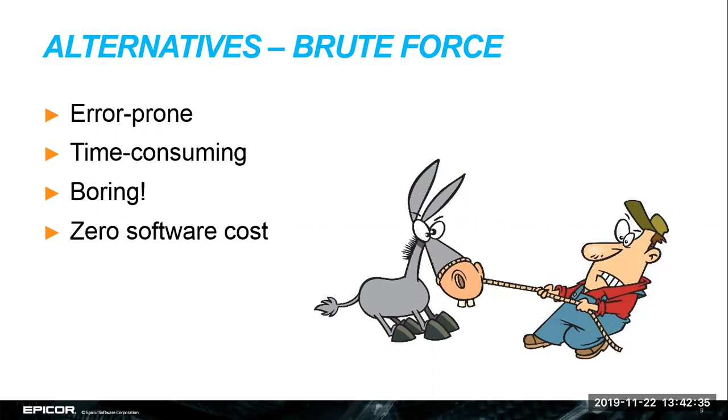The other alternative is the two-step approach. So the two-step is where you would export that information into, let's say, an Excel or a CSV format, and then import that into EPICOR. So it's slightly faster than brute force. I'd say it is faster if you have thousands of parts.

It is faster, but most of the time it requires setting up that data, massaging that data in both CAD and in EPICOR, so that as you import it, it's in the correct format, and so that there's no errors when you're importing that. Same thing when you export it. We have to make sure that the data that we're getting from CAD is in the correct format. So there's some time required to do that. There is no bi-directional connection.

So with CADLink, one of the benefits is not only the automatic part and bill of material creation from that CAD integration, but also the synchronization of data between your engineering and EPICOR teams. So with CADLink, we have a bidirectional connection, so we can synchronize descriptions, we can synchronize part information so that your engineers are working with the same information that people in EPICOR are working with.

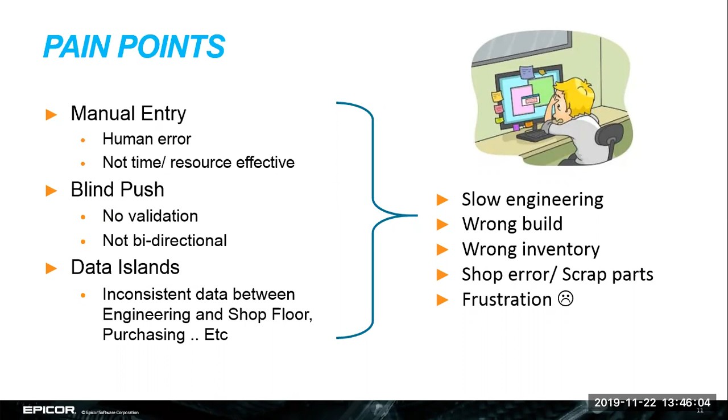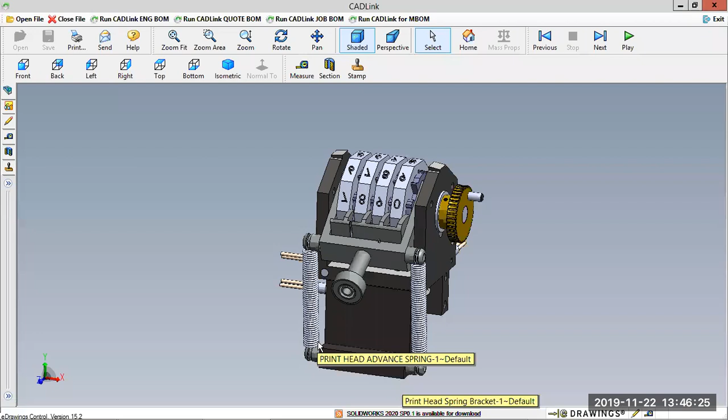So what's our solution? Well, our solution is CADLink. That live bidirectional integration between your engineering software, CAD, PDM, and PLM, and EPICOR. So what does that look like? Well, let's take a look right now. I'm going to jump into a demo. To do that, I'm going to use this model here. So I am using an eDrawings version.

But like I said before, we have integrations to over 40 different CAD, PDM, PLM systems. If you are interested in seeing a demo with your engineering files, we do offer custom demos, so send us your files and we can show CADLink working with your files. For the purpose of this webinar today, I'm just going to be showing our eDrawings integration here on the EPICOR sales image.

And CADLink is a direct integration to those CAD systems. So in here, we can see that at the top, I've got my CADLink options. So run CADLink engineering BOM here at the top. In your CAD system, it would work exactly the same way. In SolidWorks, we're built into the tools option menu. In Inventor, we have another ribbon at the top. In PDM, we're built as an add-in to your PDM system.

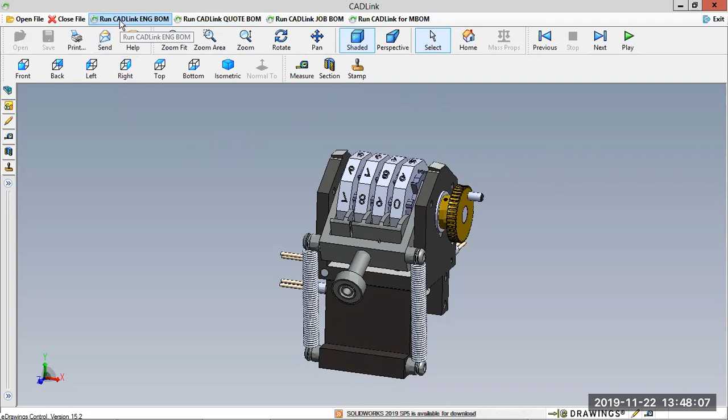So we're integrated directly into the CAD software. So your engineers don't have to leave the application that they know to be able to grab bill of material and part information and push that into EPICOR. So I've got my assembly here. I'm an engineer, I've finished my design, and I want to push this bill of material into EPICOR. So I would just launch CADLink engineering BOM.

And what CADLink is doing now is it's going to grab that bill of material from your CAD system, and it's going to grab that part information, and it's going to compare with what currently exists in both the EPICOR part master and what currently exists in my EPICOR bill of material for this part.

So CADLink can be extremely useful if you're going from Rev A to Rev B, and you're updating that bill of material in EPICOR. You can see exactly the changes that you've made from Rev A to Rev B that you're about to make in EPICOR. Because we compare the bill of material that you have in CAD, which is now your Rev B, with your Rev A in EPICOR. So we can see parts that are being removed, quantities that are changing, parts that are being added, etc.

And the result of that comparison and how we view those details in the CADLink interface, which is what we're looking at here, is through our color coding system.

So we can see, or I'll show you that on the left-hand side, we see an indented bill of material structure. So we do maintain that indented bill of material structure coming from your CAD assembly. There's no limit on the number of sub-assemblies that you can have here, but we do maintain an indented bill of material structure in EPICOR. And we've got all of these different colors that are showing me the results of that comparison between my CAD assembly and what currently exists in EPICOR.

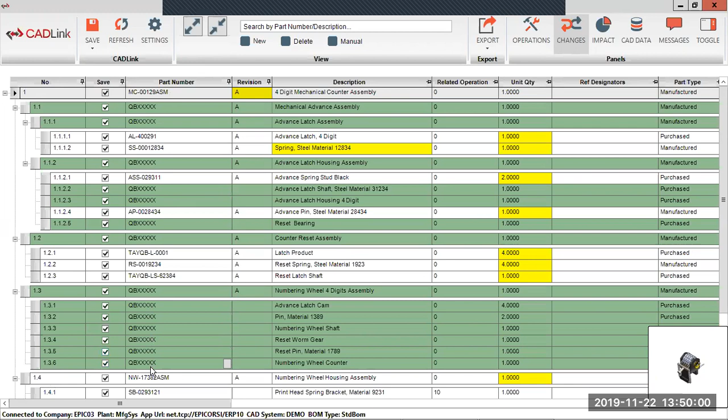So going through each of these colors, the green line items that we're seeing here, these are parts that do not yet exist in my EPICOR part master. So CADLink uses the part number as the key to look into the EPICOR part master to try and find that part. If we do not find it, we will highlight those in green to indicate to the engineer that this part number does not yet exist in my EPICOR part master. CADLink will then create that part for you and insert it into this bill of material in EPICOR for you.

So again, really going back to reducing the double data entry, our engineers are entering this information already in our PDM, PLM, or directly into our CAD system. We don't want to re-enter that information. We want to let CADLink create those parts and insert that into the bill of materials for you.

We can see that for these green line items, we've got a QB and 5 X's at the end for all of them. You may be wondering what that is, and that's the CADLink auto part numbering. So if you're not using a PDM or PLM, but you want to take advantage of EPICOR auto part numbering, we can set up CADLink to work with that. So grab the next available part number, and automatically assign that to your parts that you're creating in EPICOR. And because of that bidirectionality, we'll write that part number back into your CAD properties. So we'll see what the generation of these part numbers will look like when I do a save into EPICOR.

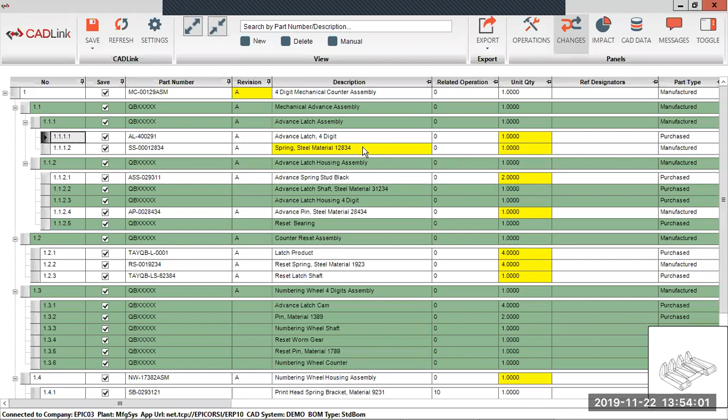Going back to that bidirectionality, seeing that there's a discrepancy in the values here, we can then decide which value we would like to use as the appropriate description. So I can right click on these fields, I can view these values, and I can select which, in this case, description I would like to use. So in this example here, I have the material word in short form in EPICOR. And in CAD, I have material all written out. So maybe I want to use the fully written out word. So I can select that and I can synchronize this piece of information between CAD and EPICOR.

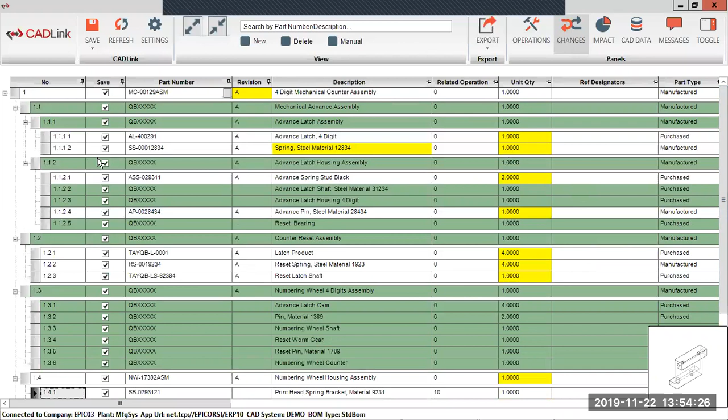So I want all of my data to match. I want my data to look like this white line item down here, right? So my part numbers exist in EPICOR, my description, my revision, all match. That's really what I'm aiming for. I want a fully white bill of material in CADLink to indicate that everything is synchronized and everything exists in EPICOR. If neither of these descriptions are correct, I can also type in a new description manually, and it'll update both EPICOR and CAD with this new description.

Moving down to the bottom of my bill of material here, I notice I have a gray line item down at the bottom here, 1.4.6. Now, a gray line item in CADLINK is telling me that there's a part that exists in my EPICOR bill of material that no longer or does not exist in my CAD assembly.

So a lot of the times you'll see this, maybe if you're replacing a part in one of your sub-assemblies, you need to remove a part and replace it with a different component. Then that removed part, it'll exist in your EPICOR bill of material for your previous revision, but it's no longer in your CAD model. So we highlight those in gray to indicate that this is a part that we want to remove from the EPICOR bill of materials, because your engineer has decided, no, I don't need this part anymore. I'm going to remove it from my CAD bill of material, and therefore I no longer need it in EPICOR.

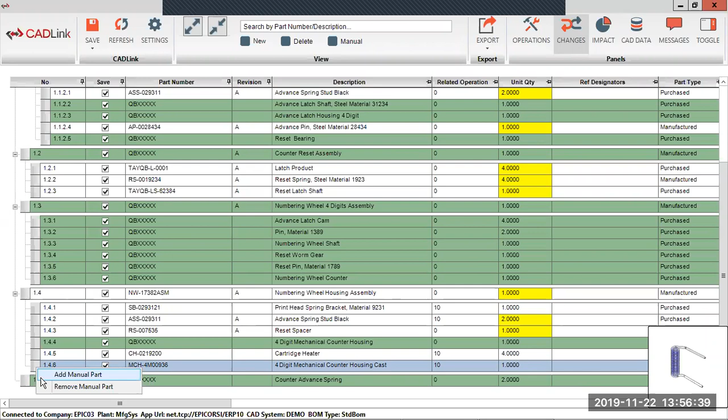We can also add a new line item. So here I added a new line, 1.4.7. This part does not exist in my CAD assembly, but may still be required in my EPICOR bill. So Loctite, glue, grease, paint are typical examples of something that my engineer wouldn't necessarily model, but you still need to manufacture this part.

So I can add a new line item here, and I can do a search in my EPICOR part master for existing parts and add this to my bill of materials here. Setting the quantity, because this is not coming from CAD, so I don't have a quantity to read from. We can insert and create a full bill of material in this CADLINK interface. A full manufacturing bill of material, I'll say.

The one thing to note about these manual parts is that we do not write these back to your SolidWorks model, or to your CAD model, sorry. This information will reside purely in EPICOR, so we won't insert the solid model into your assembly. It'll just be components that are on the bill, but are not modeled in your CAD assembly.

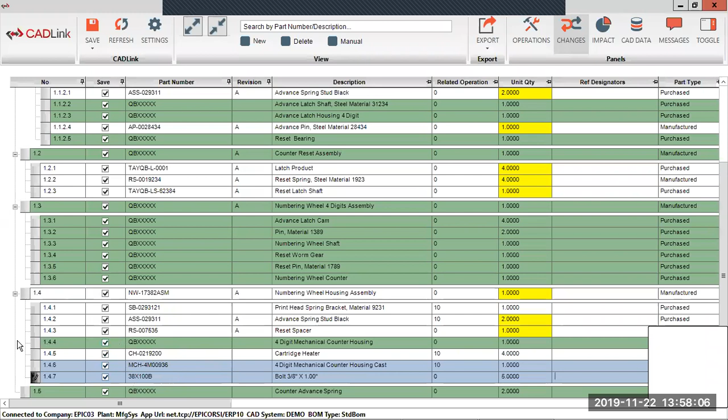All right, so moving on, I'm gonna scroll a little bit further to the right here, and I'm going to show some of my EPICOR specific fields. Now here I have things like part type, unit of measure, product group, part class. These are EPICOR specific fields. These are typically not properties that are maintained or inputted into your CAD properties. But in CADLINK, we want to make sure that when we create parts in EPICOR, that we give the opportunity to set up those parts as much as possible.

So CADLINK is an engineer's tool. The engineer is supposed to be using CADLINK to push bill of material and parts into EPICOR. And so we give them the option here to choose product groups, part classes, based off of options that exist already in EPICOR. So all of these are drop-downs, meaning I'm showing you only the available options that we have in EPICOR. So things like product group, I'm only showing you the product groups that I have in EPICOR. We don't let users or engineers create new product groups, part classes, units of measure, etc. through the CADLINK interface. They have to select an option that exists in EPICOR.

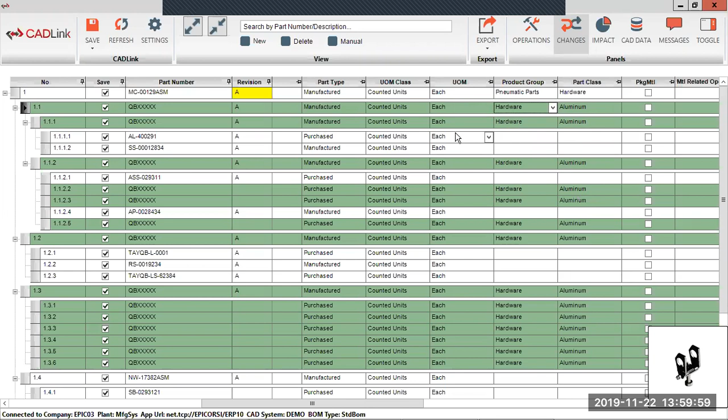Scrolling to the right, this is where we'll find our raw material information. And there's two ways that CADLINK handles raw materials. The first is we can read a raw material from a CAD property. So if you have the raw material part number set up in your CAD properties, we can read that and automatically insert that into these columns here, as well as the material quantity. Or we can allow you to search through the EPICOR part master, much like I did with that manual part that I inserted earlier, and insert the raw material here.

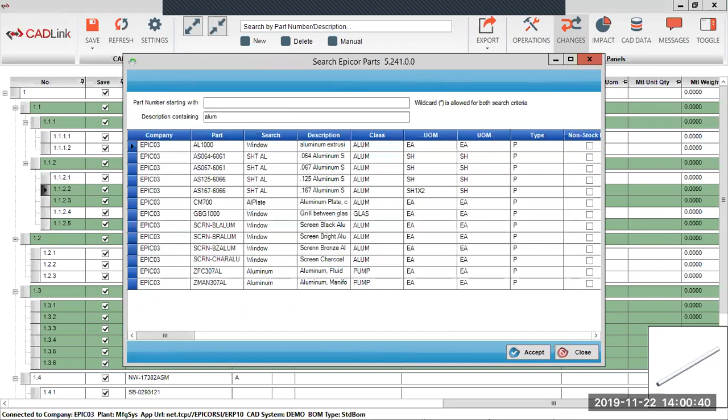So I inserted a piece of sheet metal here, and I'm going to input a quantity. So if I don't have these mapped in my CAD properties, I can also add a raw material through the CADLINK interface. Going back to that bidirectionality, we will write this raw material part number and quantity back into your CAD properties. So making sure that the information is synchronized and up to date. Really the big useful part of the CADLINK tool.

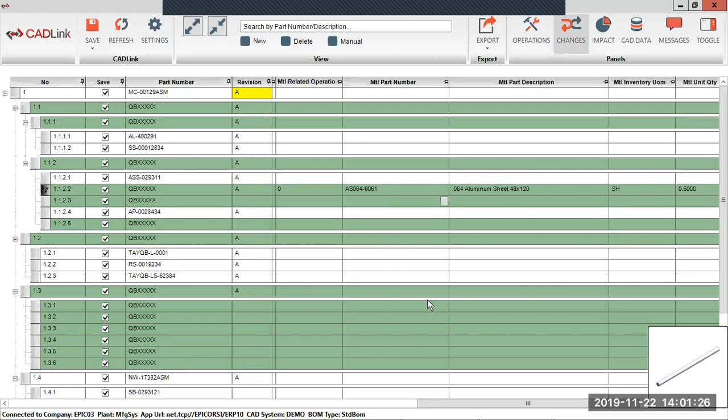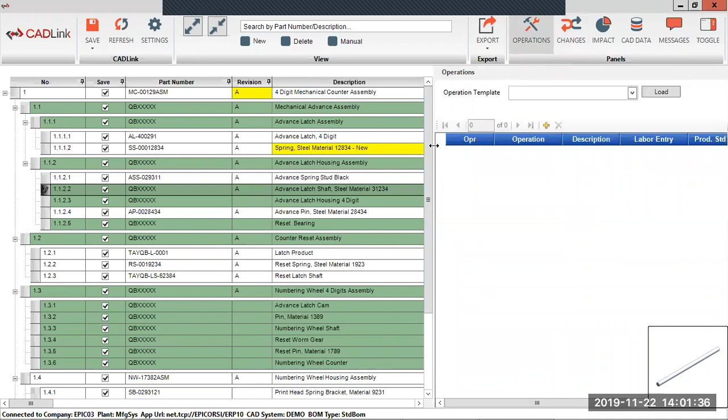The next thing I'm going to show are some of these side panels that we have here. So in CADLINK, I do have the option to assign routings or operations to my assembly. This is optional if your design engineers are not responsible for this, then they don't have to do this step. But they do have the option to assign or create new operation sequences.

So I can add an operation 10 here, choose an operation code that exists in EPICOR, add my labor entry, production standard, standard format, and setup hours. So I can create a brand new list of operation templates here. Or I can load an existing operation template from a part in EPICOR.

So if I know that all of my aluminum extrusion parts, let's say, need to get cut and deburred, and I know that I have an operation template in EPICOR that I can use for that, then I can automatically pull that in the CADLINK interface and insert that operation template or sequence in EPICOR as well. So I've applied this operation template for this 1.1.2 subassembly here.

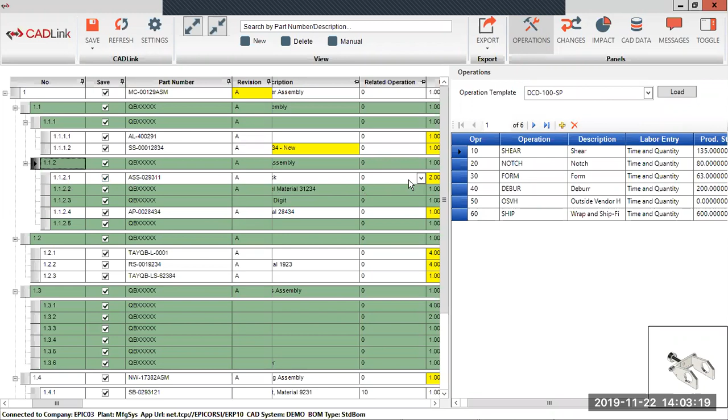Now that I've applied the sequence, I can also go into its child components and assign a related operation. So where do these parts get consumed in this operation sequence? By default, if you don't select any, it'll go to 10 when we create this in EPICOR. But we can also set the related operation to other operations in that sequence if we need to. So again, this is optional, but can be a very powerful tool if your design engineers are the ones setting up the manufacturing process for these parts.

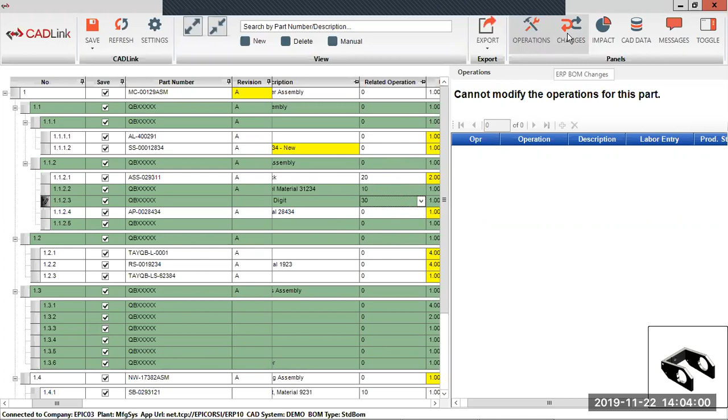The next tab is the Bill of Material Changes tab. Now this is a read-only summary of the bill of materials changes we're about to make in EPICOR. And so we're only showing you what we're about to change in EPICOR. Now this bill of material changes tab is tied to the Save checkbox column that we have here. And the Save checkbox column is what we use to control what we save into EPICOR.

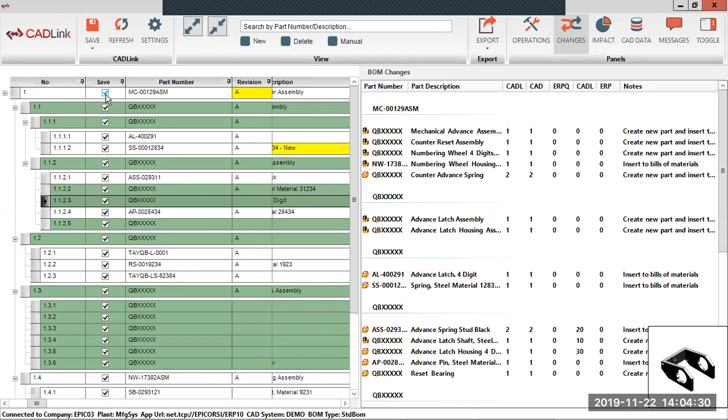So I can deselect everything and maybe choose just a subassembly. And my bill of material changes window here will reflect what I am choosing to save and to synchronize with CADLINK. So this is a nice view if you have a very large bill of materials and you're only changing a couple of things, or you're going from Rev A to Rev B, and you want to only see a summary of what you're changing. You can go into this tab and quickly see that information at a glance.

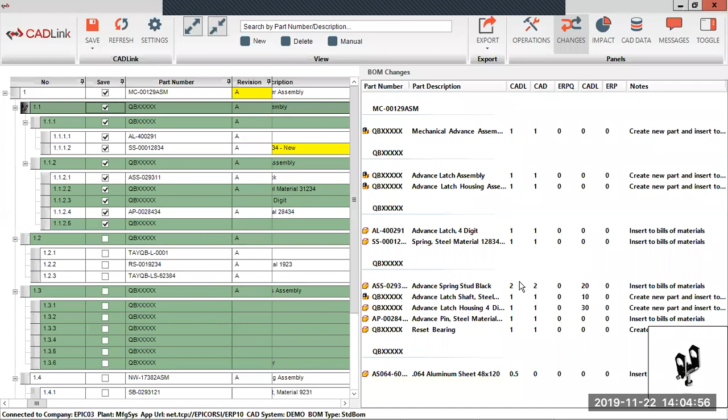The next tab is the Manufacturing Impact tab. And this is showing me a read-only view of certain information in EPICOR. So I can select certain parts here that exist in EPICOR, and I can view the EPICOR inventory. I can view POs, job orders, where used, and a cost summary. Again, read-only, but may give the engineer some insight into what we've got on hand and what's going on in the EPICOR world. So leveraging that EPICOR integration to give more info to the engineers, a bit more of a background as to what's going on in the EPICOR world.

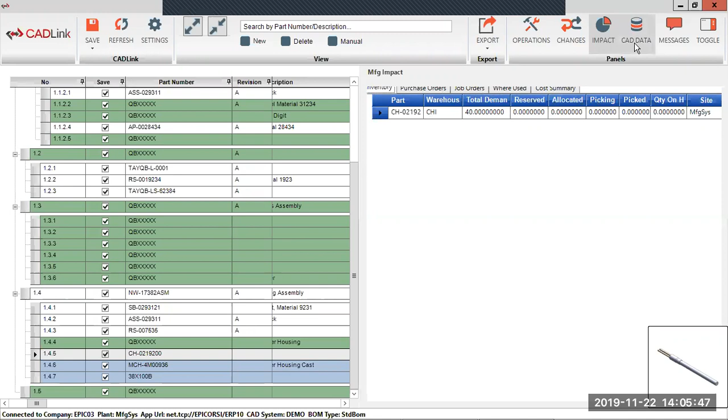The CAD data will show me CAD properties that I have from my CAD models. So I can click around and view the CAD properties from my solid models. This is read-only, really meant just so that your engineers can look at the properties in CADLINK without having to go into their CAD, find the part, open the part, look at the properties, etc. It's just a convenience thing so that they can view the CAD properties from the CADLINK tool.

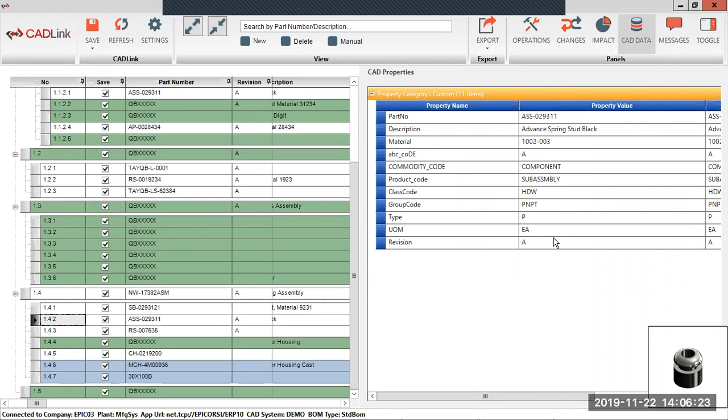And the last tab here is the Messages tab. This is where I will view any validation messages that came from the comparison of my bill of material between CAD and EPICOR. So if I have something that does not conform to any of my EPICOR rules that I set in place, I will see a message here. If I have a message here, the save checkbox will be disabled, and I'll need to resolve it before I can save this bill of material into EPICOR.

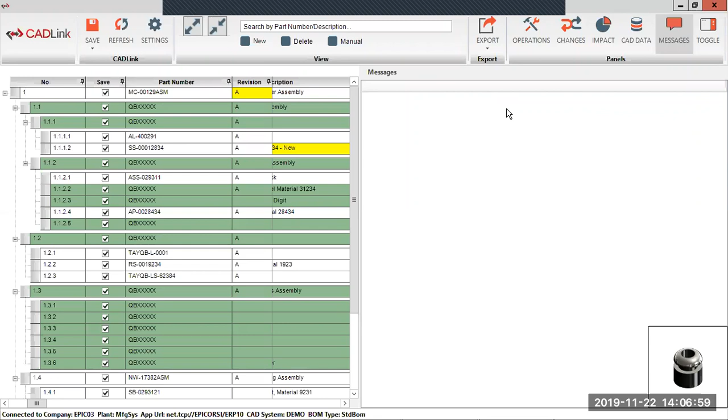And that's the bulk of the CADLINK application. Now, before I quit this, I do want to hop into the settings very quickly, just to show a few of the features that you can have with the extended field mapping module.

I can select if I want to show it in the CADLINK grid, if I want this to synchronize between CAD and EPICOR, or just push to EPICOR. So it gives me a lot of flexibility into what fields I'm adding or linking with CADLINK between CAD and EPICOR.

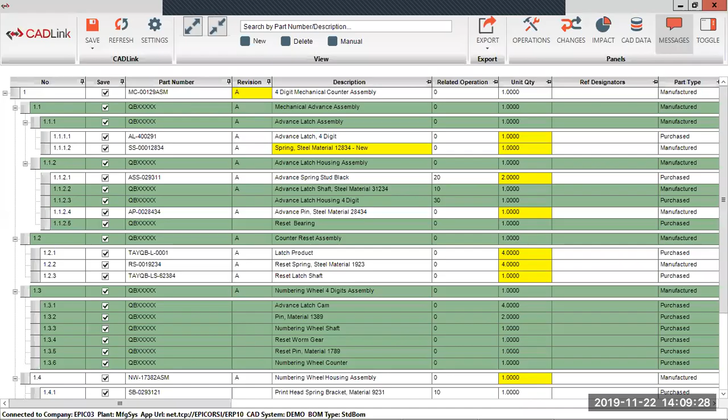All right, I'm going to hop back into my PowerPoint here.

So just a few more words on the extended field mapping module. Really, this is to add your own CADLINK BOM grid fields and field mappings between CAD and EPICOR. We allow you to map between the EPICOR part table, part material table, job material table, quote material table, and any of your EPICOR user-defined fields. So there's a lot of options there to let you push as much information as you can into EPICOR to help set up those parts.

Another good example of this is setting up certain quantities. So if I have certain calculations that I need to make for my raw materials or for my standard parts, I can apply that in the CADLINK custom logic.

So just a few more details on this. This is in C#, and it lets you create if, else, true, false statements here inside of CADLINK. So you control this. You don't need to reach out to us to apply or set up new logic. This is something that you can do on your own.

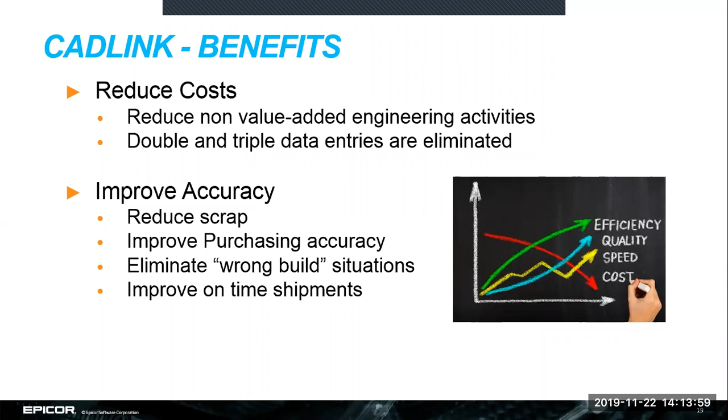What would a typical ROI analysis look like for CADLINK? Typically we say an engineer spends about 1 hour on BOM data entry per day. This can vary depending on your company and organization. We do have ROI tools available if you'd like help with calculations, but at a glance, we've seen time and time again that about 1 hour of work comes down to about 3 minutes with CADLINK.

So if you've got 8 engineers doing engineering work and designing products, that's a whole person's workday in BOM entry that we can save with CADLINK. In terms of dollars, that comes to about $65,000 per year. This will range depending on the size of your engineering department, but it's a great rule of thumb we've seen time and again in the industry.

Quick point here, we are cloud ready. Ray mentioned at the beginning that EPICOR is also in the cloud, and CADLINK can also work with the cloud version of EPICOR. So whether you're on-prem or in the cloud, we've got a CADLINK option for you.